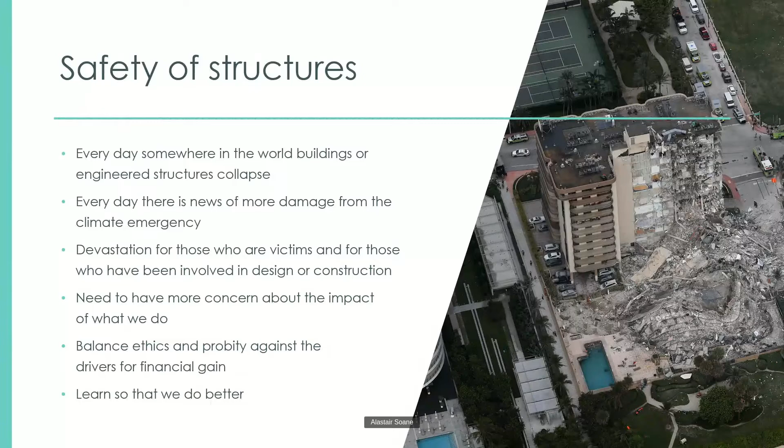CROSS stands for Collaborative Reporting for Safer Structures, and it relates to both structural and fire safety. Now, according to independent surveys, we're impartial, authoritative, and informative, but above all, we are independent. So we gather confidential information and reports about safety concerns and occurrences, and we depend upon groups of volunteer experts to provide comments and advice on the reports. The reports and advice are then published on our website.

Now, as shown here, there are several factors which influence safety. And top of the list is to have an embedded safety culture, which is upheld by competent people who use quality systems in their work and have comfortable relations with appropriate regulators. This ideal, however, is often challenged by those operating the financial levers.

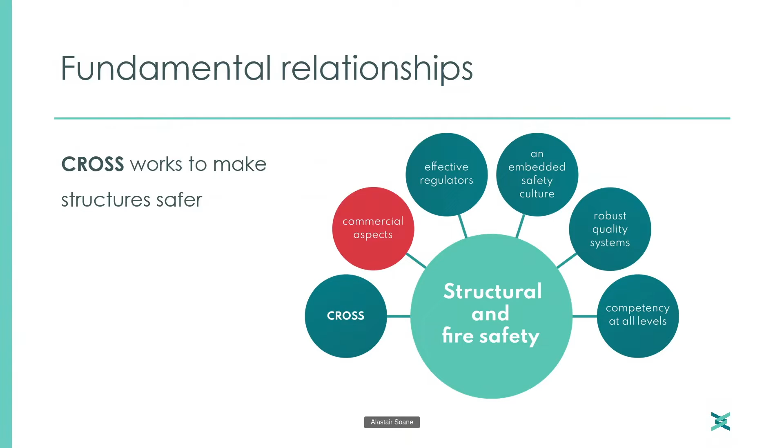So the timeline for CROSS: it began in 1976 when the Standing Committee on Structural Safety, SCOSS, was set up after several major building collapses and bridge failures. It was founded by the Institution of Structural Engineers and the Institution of Civil Engineers, and they were later joined by HSE, who came in as sponsors.

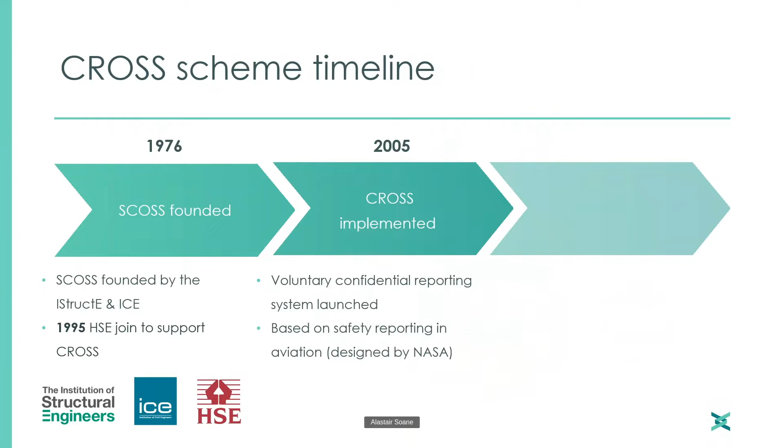The committee noted and provided advice about structural safety matters in the public domain, but came to recognise that there were many events which went unreported for various reasons. A principal one being that people, engineers, or their lawyers did not want what they perceived to be dirty linen washed in public. SCOSS therefore decided on a trial period of confidential reporting and used as a model a system used by NASA called Aviation Safety Reporting System. And the scheme was then called CROSS. At that stage, it stood for Confidential Reporting on Structural Safety.

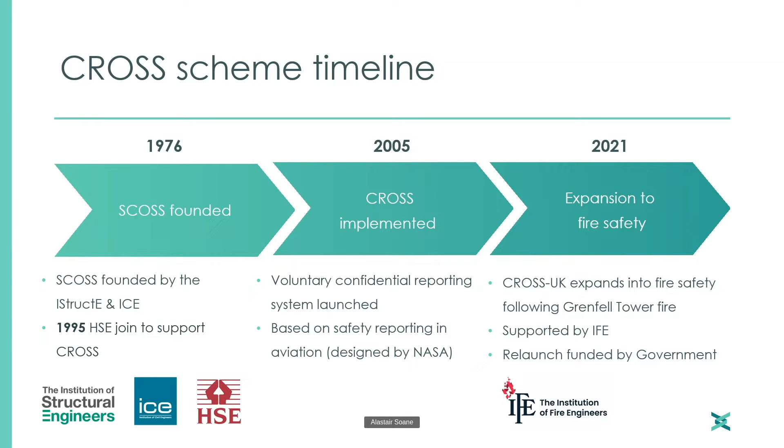In 2021, CROSS expanded into fire safety, and this was a result of the dreadful fire at Grenfell Tower, and this will be detailed later on by Paul and Neil. But an important outcome for CROSS is that we were encouraged and supported by government to expand our structural activities and expand into fire safety. So in 2021, we were joined as supporters by the Institution of Fire Engineers. And the name then changed to Collaborative Reporting for Safer Structures, cunningly devised so that the acronym stayed the same, but we could now embrace any form of threat to structures.

So the reporting process: handling reports is our core business, and we are interested in reports about the four main stages of the life of a building: the design, the construction, the operation phase, and the end of life. And we define a concern as something which is noted pre-construction and dealt with appropriately. An event is an occurrence which happens on site or during occupation, and there is physical evidence of some failure or collapse. Now, most structural reports come from the design or construction phase because that's where most of our reporters are at the moment. But in due course, we can expect more to come in the operational or occupational phases from fire engineers and those in the fire services.

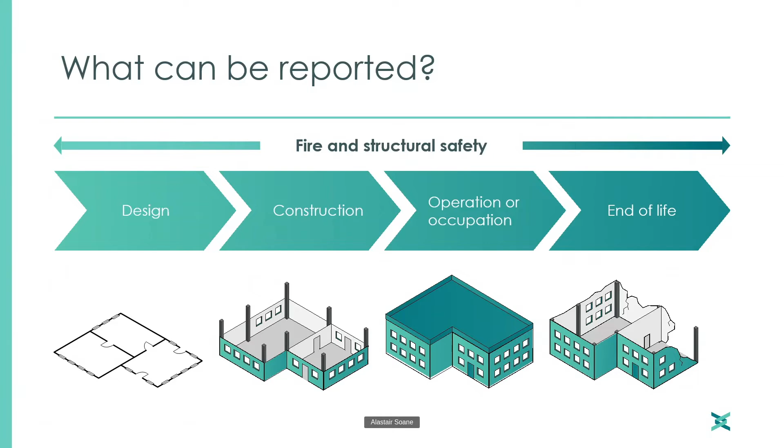So what are the benefits of confidential safety reporting? These are real, some of them are shown here, and they start at the top. They make structures safer and ultimately save lives and reduce injuries, but also protect the well-being of you, the institution member. Every effort must be made to design, construct, and manage our projects safely so that we can protect the public and improve the physical and mental health of our engineers, fellow professionals, and operatives on site.

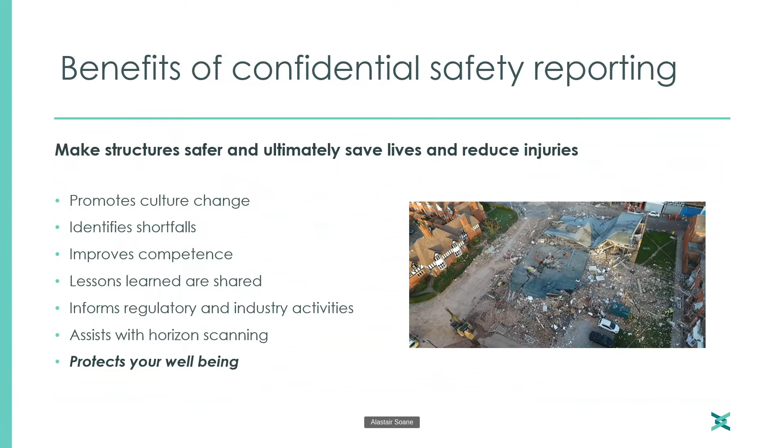In addition to reports, we publish alerts, either because there's been a pattern of similar reports about a topic, or in response to a significant failure or collapse event which has been reported in the public domain. We'll give one or two examples here.

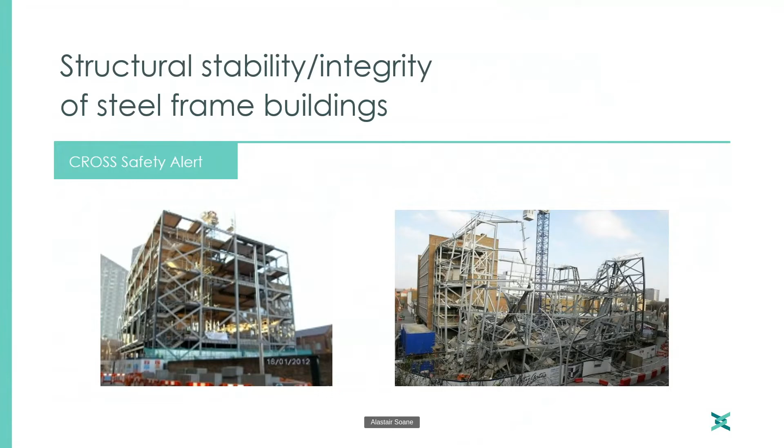There are echoes here of the 1981 Kansas Hyatt Regency disaster in America due to the tension failure of a hanger, which resulted in over 100 fatalities. Now, as with all alerts, there's general advice given, in this case about complex steel frames, but also, as with comments on our reports and in all alerts, we never apportion blame.

Collapse occurred. Now, Cross is very concerned that collapses of bridges during construction still occur, because such events were the catalyst for SCOSS way back in 1976. So we published an alert on this bridge failure along with our colleagues in Cross US, and it draws attention to matters which should be considered by all parties involved in design and construction, not just those involved in bridges, and I commend this report to you.

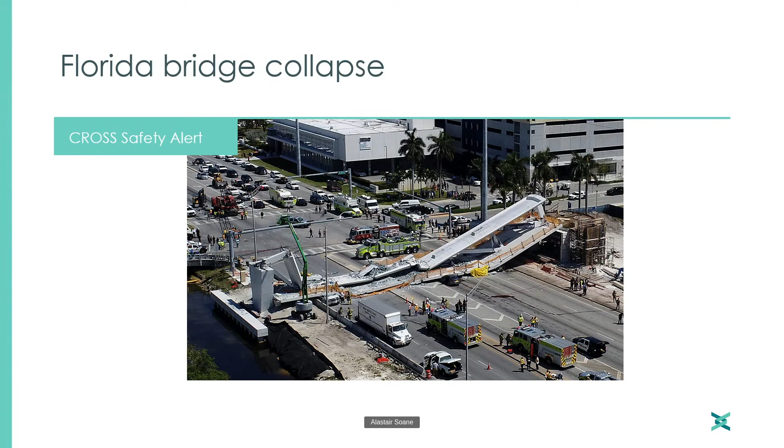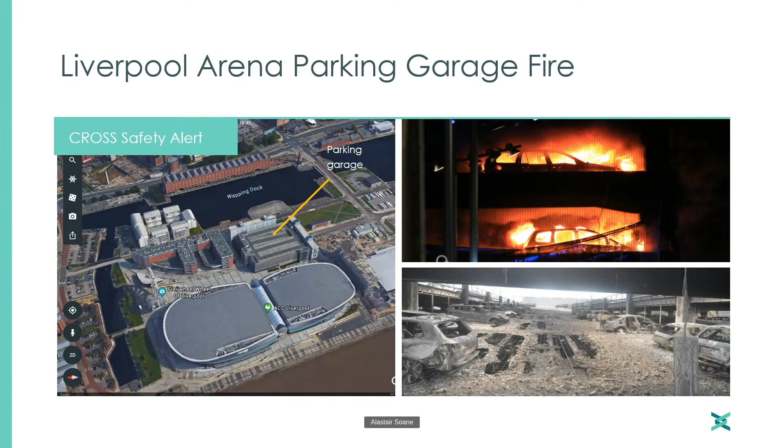But just above it is the parking garage, and fire started suddenly, spread rapidly, and 1,100 vehicles were destroyed in the blaze. It was possibly another near miss because there were people parking their vehicles at the time the fire started. So the lesson learned here was the importance of having a robust and fire-resistant frame, in this case precast and in situ concrete, and the importance in the future of having measures to restrict the growth of vehicle fires. It's a problem likely to become more acute with the increase in numbers of electric vehicles.

Now, autoclaved aerated concrete is different from normal dense concrete. It has no coarse aggregate, and it's made in factories using fine aggregate, chemicals to create gas bubbles, and heat to cure the compound. And it's weak. When it's reinforced, it is called RAAC, and RAAC planks were widely used in the UK for flat roofs, predominantly during the 1960s and 70s, but a few were used later.

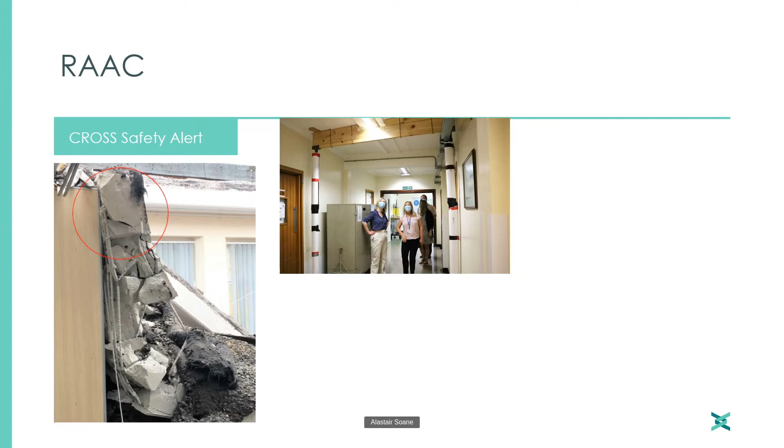Now, in late 2018, we received a report about a sudden failure involving the flat roof in a school constructed using RAAC planks. There was no warning. And although some engineers had known of potential problems for such structures for years, the Cross report acted as a catalyst, a precursor. So we published an alert, and then multiple cases of potentially defective RAAC planks were discovered.

One aspect is that many hospitals have propped roofs, and the replacement costs are currently being calculated in the millions, if not billions. This was a statement recently by a government minister, and clearly we would be concerned about immediate collapse, but hopefully the measures being taken at the moment will prevent that. But it's a very good example of Cross at work: a report is received and published, more reports follow, an alert is published, and then multiple cases of potentially dangerous structures are revealed so that action can be taken.

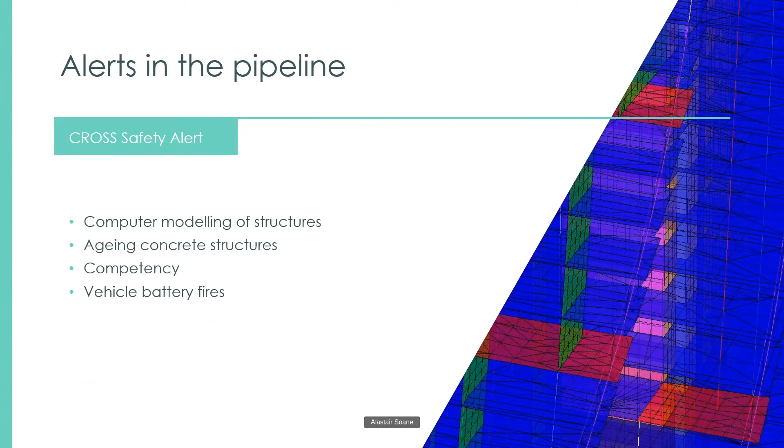We always have a few alerts in the pipeline, and currently one of them is computer modeling on structures. We've had quite a number of reports about issues with people understanding and operating finite element systems properly. We are concerned about aging concrete structures for a variety of reasons, and competency is very high on the agenda post-Grenfell. Then on fire, going back to vehicle fires, battery fires are a potential risk in the future, especially from automobiles. So at any time, if there is an event in the public domain from which we feel lessons may be learned, we will produce an alert.

Very briefly on the climate emergency, it's obviously the biggest challenge facing humanity, and there are huge impacts on structures and infrastructure. There is a relationship between climate emergency and safety, and we know we must learn all the time about the destructive effects of these changes and the need to provide protection for both people and the resilience of our structures and infrastructure.

We also know that we must reduce the carbon footprint of construction. So there's a climate emergency page on our website, but we need a lot more input. We need more reports. So perhaps you can help if you know anything to do with a structure or infrastructure which has been affected adversely by climate change—tell us about it so that we can learn more, because matters are only going to get worse.

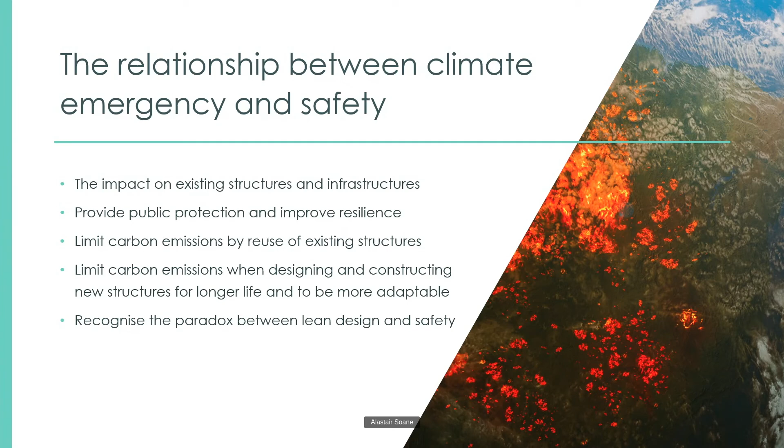On the bigger scale, we believe that there is a need for CROSS around the world. Sharing information from confidential reports is the goal, and having an international network of communities based on CROSS principles will help everybody. The value of such a network has been demonstrated by the International Confidential Aviation Safety Systems Group—a bit of a mouthful—established by NASA, which promotes interaction between aviation safety groups around the world as an effective method of ensuring aviation safety.

In due course, it's the aspiration that CROSS International will become an arena for global discussion. We will identify trends, and it will become an international depository of knowledge about safety in the built environment.